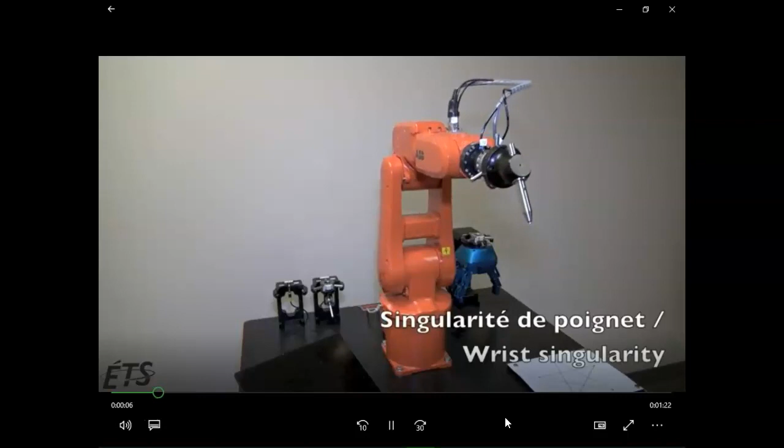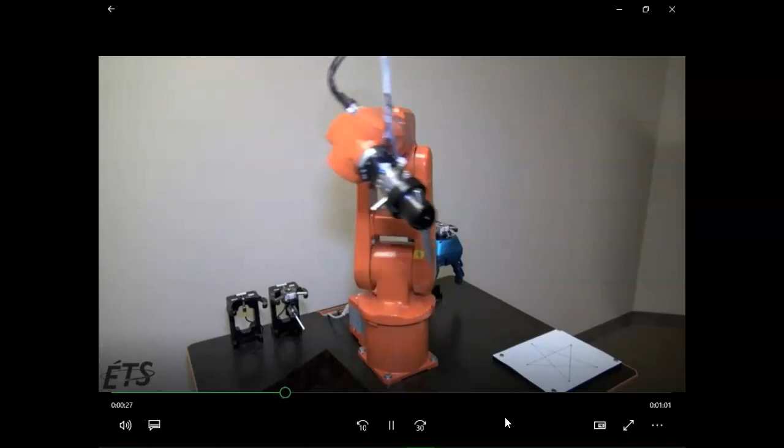What it's doing is trying to move to different positions, but because two joints line up, it causes unpredictable movements. Because what it's trying to do is get away from that axis where they're both aligned as one.

So this is why when y'all start the labs, you have to put the gripper down to a 90-degree angle. It keeps certain parts of it doing things like that. So the two joints that are coming together are this one here, and that last one.

So that's what a singularity is, guys. What happens is that when you get into a singularity, singularity would be two joints lining up, and the robot doesn't like that, so it tries to get out of that singularity by making these unpredictable movements. Now, it does not work that way if you're doing a joint jog.

That's where you're controlling each joint individually. It'll do it in linear mode. It'll do it in tool, and it does it in Cartesian, or world coordinates.

So again, that's why we have y'all tilt that down, just because it keeps the unpredictable movements to a bare minimum. That's exactly what you want, because y'all saw how fast that's moving. If you get something in the way of it, it's toast.

All right, picking up where we left off last time. So we talked about human factors, right? Because humans, we are naturally curious creatures. So thus we always have to sit there and go, what does this do?

So human factors is one of the biggest issues with safety on anything, because think about it this way. How many of you have ever climbed a fence to go into somebody else's yard or something? Everybody's kind of done that. Because why? Everybody sits there and goes, well, the rules don't apply to me at this point. But they do, and it's not what you're supposed to be doing.

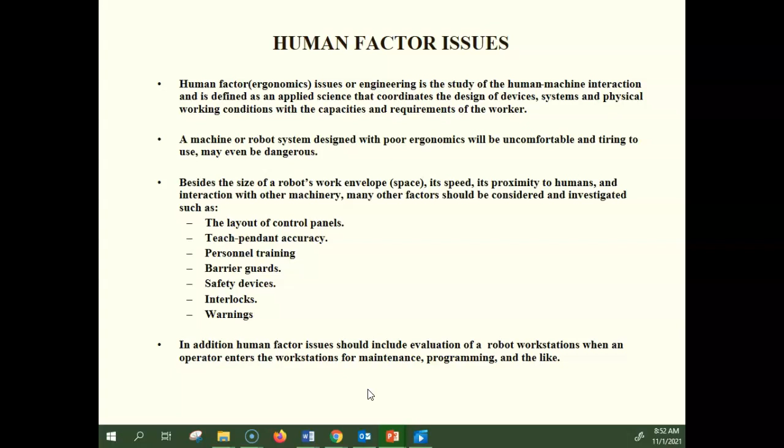Okay. So safety monitoring involves the use of sensors to indicate conditions or events that are unsafe or potentially unsafe.

It is not used only to protect humans who happen to be in the cell, but also the protection of the equipment in the cell. Because one of the things we really don't want to do is wipe out the equipment, wipe out the humans, wipe out anything that's in there. That would be kind of bad.

So some of these can be very, very simple. Some of them are like a vision system. If you have a vision system, that's a very complicated system to set up. Once it gets running, it's fine, but setting it up takes a little time.

So the people that design these work cells do it with the purpose of, is somebody going to be in there? Where does my equipment need to be laid out so my robot can get to every piece? Making sure you have door interlocks and doors in appropriate places so you can get in and out for access. I mean, there's a lot that goes into setting things up for this.

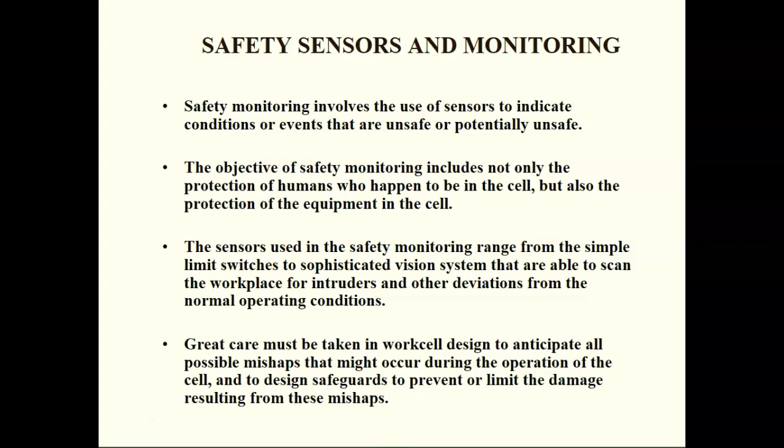Okay. So, levels of robot safety: you have level 1, which is the outermost perimeter. Level 2 would be opening the door and stepping in, and level 3 is getting right up next to the robot.

What are you supposed to have in hand whenever you walk into a robot work cell? Either the pendant or a remote operated dead man switch. Okay. That, or the robot just needs to be off or hit the E-stop so it can't move and get you.

Bad thing about robots is that they perch. Most of the time, if you're working a program, the robot has what we call a home position. And if that home position is just sitting there waiting, right? What it's waiting for is an input signal from a sensor or from the computer saying, go do your job. That's why you do all sorts of things to avoid said problems.

All right. Level 1 is intended to detect that an intruder has crossed the perimeter boundary of the work cell without regard to the location of the robot. Level 2 is to detect the presence of an intruder in the region between the work cell boundary and the limit of the robot work volume. And level 3 provides intruder detection in the work volume of the robot.

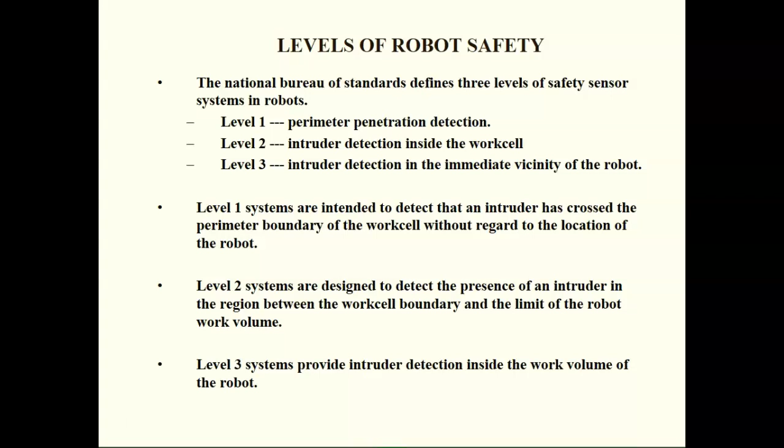Why? Because we have a barrier up around these robots. And I do mean a barrier. Okay? You have a fence all around this thing.

Okay? Anybody taken sensors before? Okay, so how expensive are sensors? Very expensive. So why are you going to—let me rephrase that.

Whenever you're dealing with money and automation, is anybody going to want to spend more money than they have to? No. So I won't say 99% of the time, I'll say a good 80% of the time, that outermost barrier is probably the biggest thing stopping that robot from doing anything to humans.

Because the second you open that door and those interlocks disengage, that's when you're going to have everything just shut down. Because that's the safeguard that is keeping you from getting hit by the robot.

Does that make sense? So yes, there can be 3 levels, but the main level you're going to encounter in the field is that outermost gate set. Why? Because it's cheap, it's easy, and it's convenient. Doesn't take very much to do it. Make sense to everybody? Yeah, the more sensors you add up to this thing, the more expensive it's going to be.

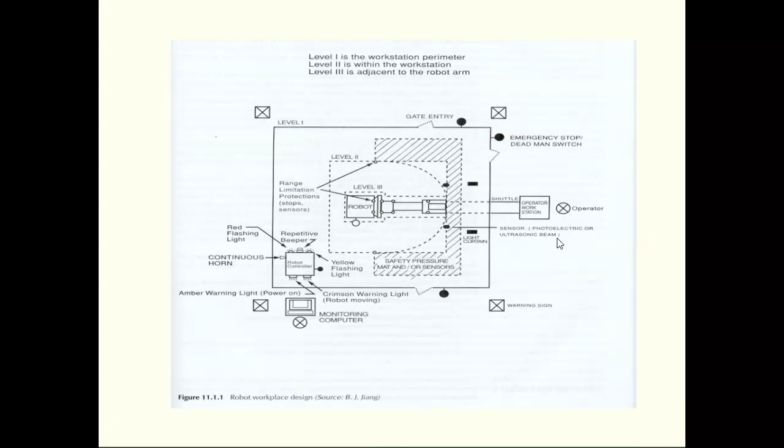There are 2 common types of safety sensing systems. You have pressure sensitive floor mats, which is how the automatic doors around the world tend to work. You step on the mat, doors open, right? If you don't have enough weight on that mat, will the door open? It will not.

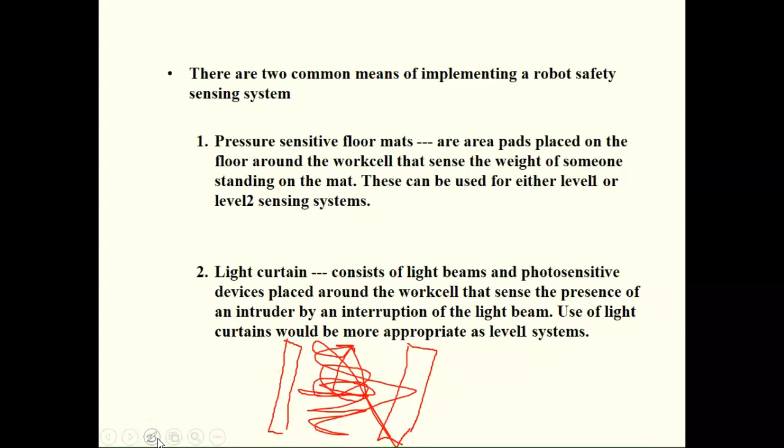And then you have one of the more popular ones, especially these days, you have what's called a light curtain. Anybody know what a light curtain is? So a light curtain, for those of you that don't know, you have two rectangular pieces, and depending upon the setup you buy, what you're looking at here would be beams of light going back and forth between these two constantly, as in it's a never-ending cycle.

So think Mission Impossible, where you have all the laser beams, and if you break the beam, what happens? The alarm goes off in the movie. In this case, something similar happens. You have infrared beams that constantly shoot at each other, and their receivers. So what that's doing is keeping a barrier between where a robot's or workstation's work is happening versus where the human stands. And if you trip one of these light curtains, it actually will trigger the whole system to stop.

Most of the time, if you have an operator inside the work cell, they have to make sure that their hands are off everything and step out of the work cell so that they can activate the robot. That is a very, very common practice these days. Why? Because it's a lot safer. So, any questions on those two?

Now, why would we use the light curtain instead of the pressure mat? Comes with the fact that if somebody's having to stand there all day, your feet are going to hurt and the mat's going to deteriorate pretty quickly. The thing about the light curtain is that you have to wipe it down periodically to get any dust and debris off it, but otherwise it just runs all the time. No problems.

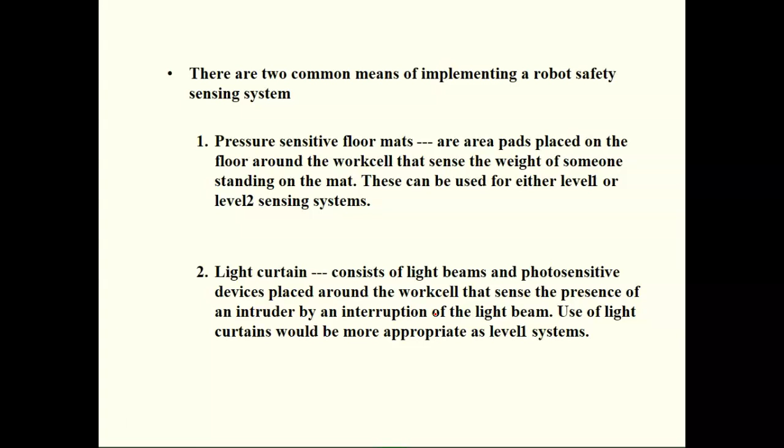So we have proximity sensors that can be located just about anywhere. Proximity sensors are great in the fact that they are looking for the presence of something. Now it can be a solid, liquid, or gas, but all it's doing is looking for input. Okay?

So safety monitoring strategies that might be followed by the work cell controller would include the following schemes. Number one, the complete shutdown of the robot and other equipment upon detection of an intruder. This is, again, the most common way we use as safety. Why? Because if there's somebody in the work cell, we do not want that robot running unless they've got that teach pendant in hand and have it in teach mode.

Warning alarms, some do, some don't. They make some of these door interlocks to where you either have to have a passcode or you have to have the key to be able to get in. And by the way, guys, when we say safety barriers, we're not talking something that sits about 4 feet high. No, these fences are generally 6 feet to 7 feet tall. And the mesh on them is about an inch, maybe 2 inches. So you can't even get your fingers through the mesh. Okay? Much less try and clamber over it.

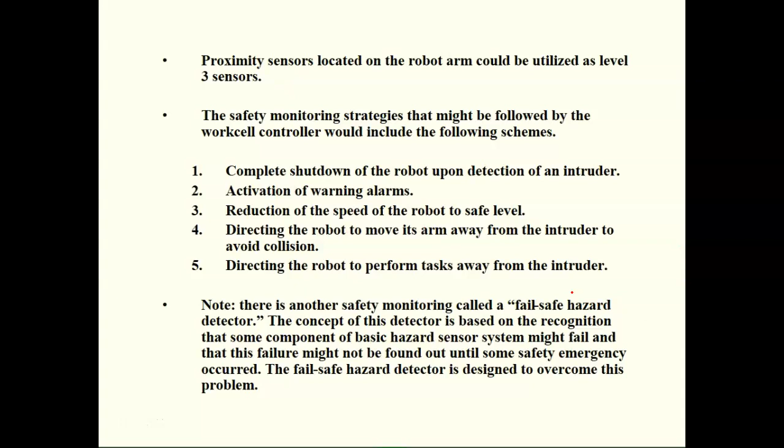Okay, so safeguarding. Most accidents occur as a result of unsafe acts by the worker, so it's generally not equipment failure. It's because the worker was either what?

Improperly trained? Careless? Anybody else? How about just straight up not paying attention?

Because the fact of the matter is, the more you do something that's a monotonous task, the more your attention tends to wander. You start getting, I don't know what else to call it, but something like ADD, where you're just sitting there going, butterfly. I'm busy doing this, but butterfly. Your mind begins to wander.

It's kind of like, how many of y'all remember your drive here today? Just about nobody will remember every detail of how they got here. Why? Because your brain has what I like to call an automatic mode. What that means is your brain is sitting there just going, okay, I've done this a thousand times, just cruise control. That's exactly what your brain does.

So one of the biggest things with this is just not paying attention, not having focus on what you're doing. Does that make sense to everybody?

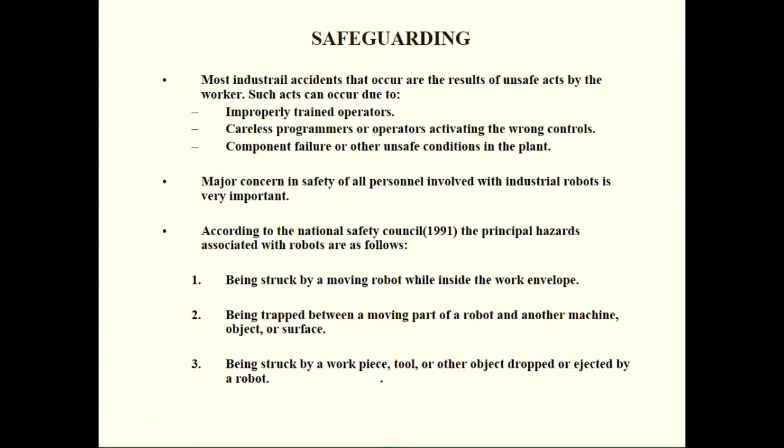Anytime you're in an industrial setting, you have to pay attention.

So robot safeguards: we erect physical barriers around the entire perimeter of the robot's workspace. You have a guard containing sensing devices that automatically shut down the robot if a person or object enters its workspace. And you put sensitized doors or gates in the perimeter barrier that automatically shut down the robot's movement when they're open.

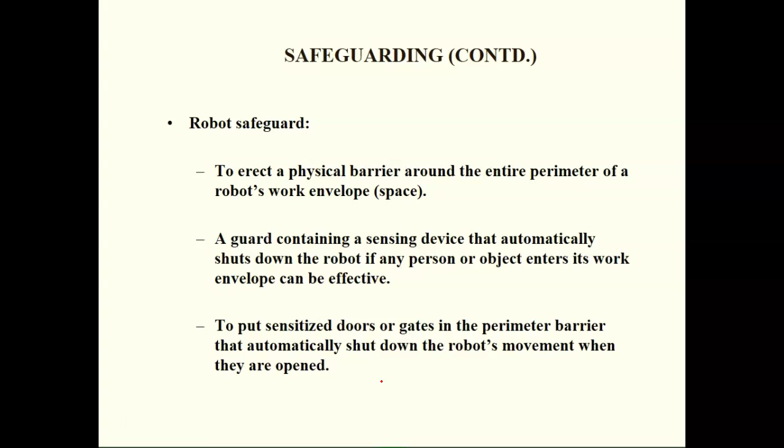Even though it's difficult, there is no such thing as a risk-free environment. I don't care who says they have a risk-free environment, there is not. We're human, we can find ways to hurt ourselves. All things in the world have some form of risk. If you have a tile floor, eventually you got to mop it. If you have a wood floor, eventually you got to clean it. Then you have a risk of somebody slipping on something.

So there's no way to create a risk-free environment because there's always the possibility of a malfunction or the violation of good safety practices. But the way to minimize these potential errors - how many of you have ever had to sit through safety orientation at work? I think just about everybody, right?

Working retail, they sit there and talk to you about things like Code Adam, which is if a child gets lost in a store. You have the basic, don't leave ladders out on the floor - it's very naughty, don't do that. Or my personal favorite, where they make you sit down and watch an hour-long video about the do's and don'ts, like lift with your knees, not your back. That kind of stuff, right?

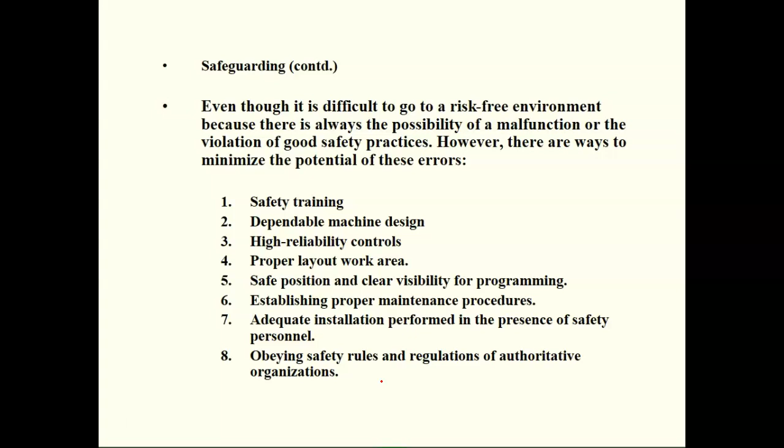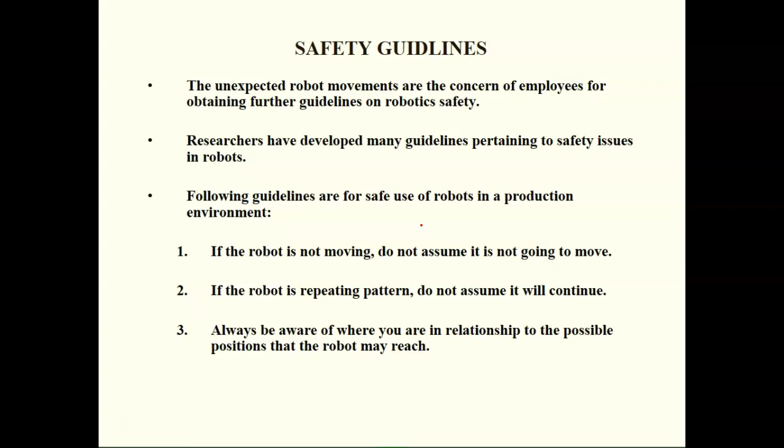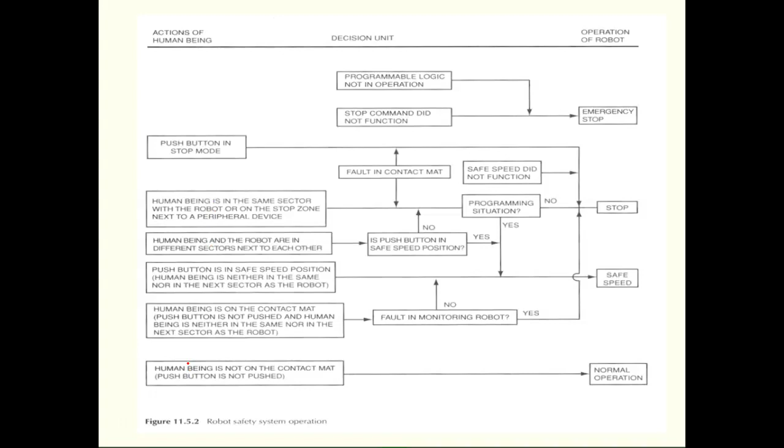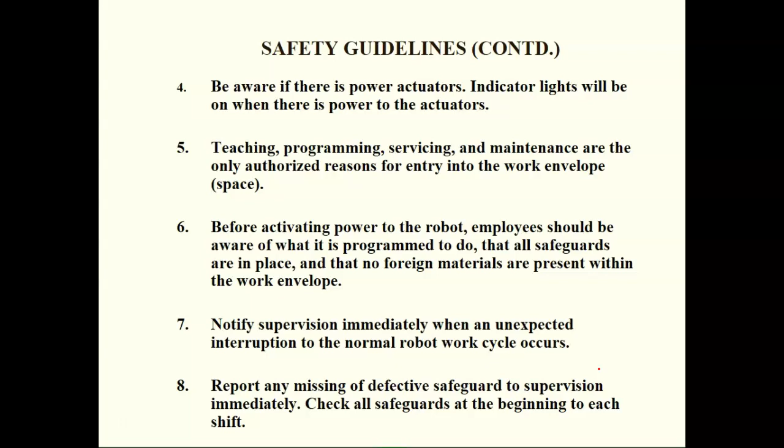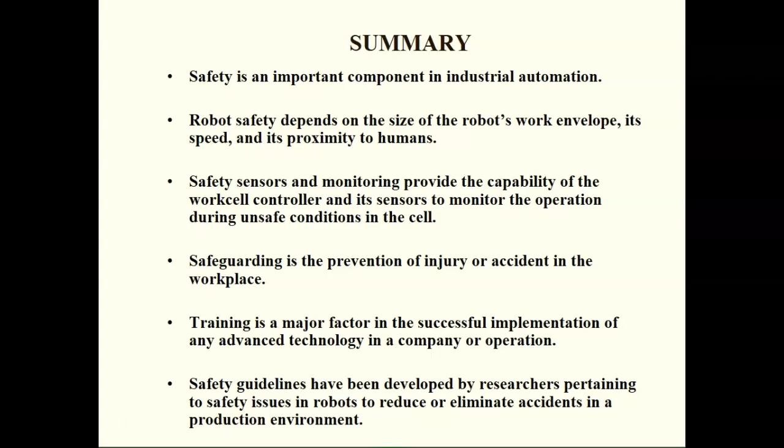So safety is an important component in industrial automation. I'm not going to read all this to y'all because y'all can read it yourself. But safety is something that a lot of people don't take seriously enough. It truly is. If you don't have it in your mindset that safety should always be first, you need to put that in your mindset because otherwise accidents can, and will, happen. All right.